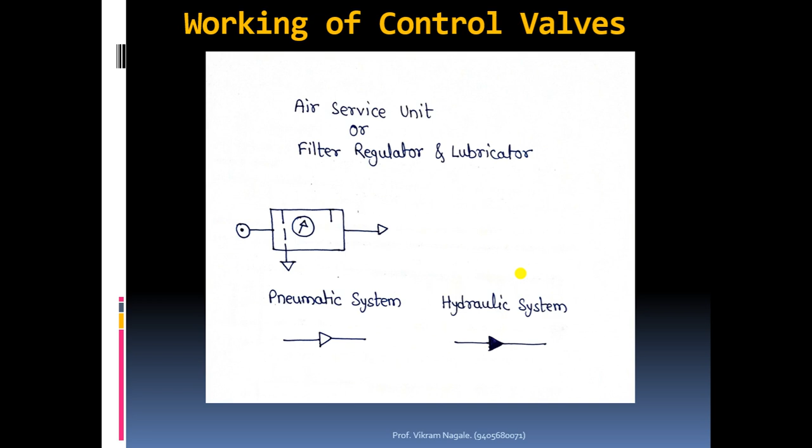In the last session, we discussed actuators, the air service unit and the control valve, the working of the control valves. Now, in today's session, we'll discuss how these valves work in actual practice, and especially the working of the AND valve.

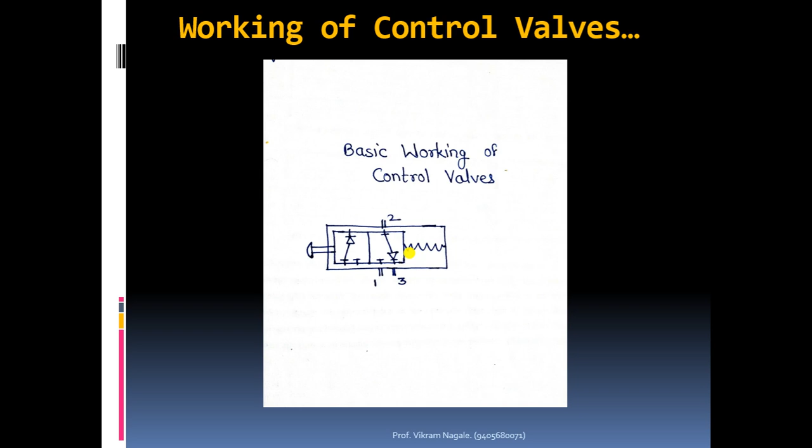This thing you will be able to see in actual, but while drawing the circuit diagram we just have to represent the blocks inside the casing. We don't have to think about what the casing is, and how the ports are coinciding with these ports. So don't worry about that, just draw the construction of the blocks, and you'll get the connections from that block, and you can pass it on to the next valve.

Okay, so here normally we are using NC valves, normally closed valves. In case of NC valves, the right side block will always be in active condition because of the spring present on the right hand side of that valve inside the casing. So because of this, for an NC, left side actuation, spring return valve, the lining inside the right side block should be like this.

As we are considering that this is not actuated, obviously we cannot show the push button in pressed condition. For showing that the valve is initially actuated, or in pressed condition, there is a different arrangement that we will see later in the next diagram. But as per standard, we cannot show the push button in pressed condition. We have another solution where we can show the pressed or actuated condition.

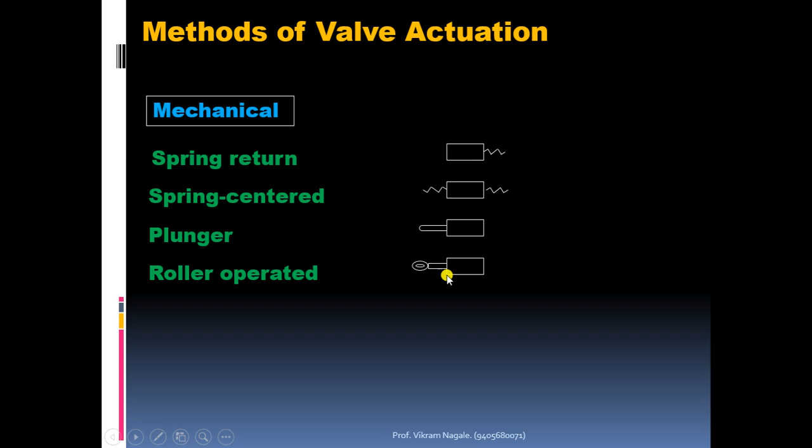This is a 3 by 2 valve with push button, and we have made some small modification in this valve. That is, instead of push button, we have considered roller lever over here. Okay, roller lever you can see here. This one, roller operated, means whenever this rod end is passing over that roller, it will get pressed.

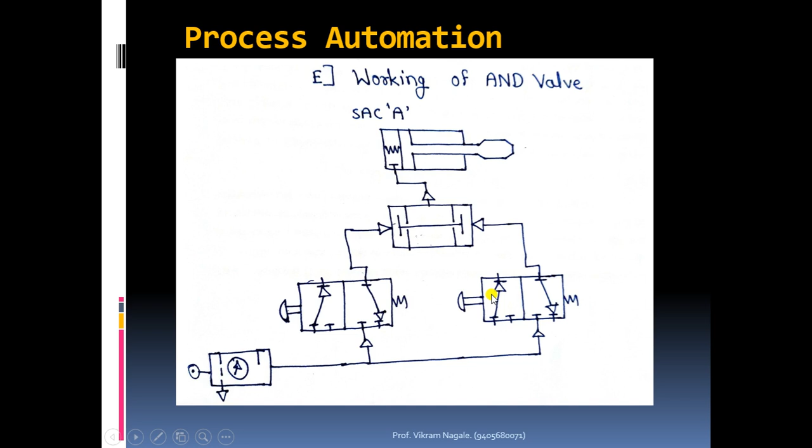And actual, this is just for drawing purpose. Actually what we have to do, we have to keep this valve with roller lever. Actually we call this as a limit switch. Okay, this limit switch which is similar to the electrical limit switch, press झाला की contact close होतात. Okay, electrical limit switch. So it's just like that.

Press झाला की obviously जसा push बटनच्या केसमध्ये होता लेफ्ट साइड ब्लॉक ऍक्टिव्ह होतो. In the same way this block will get active, left side block will get active, and whenever we are releasing this roller lever, obviously the connections will shift to the right side block, means right side block active होईल. So that is what the condition in case of this limit switch. Okay, we will call this as the limit switch S1.